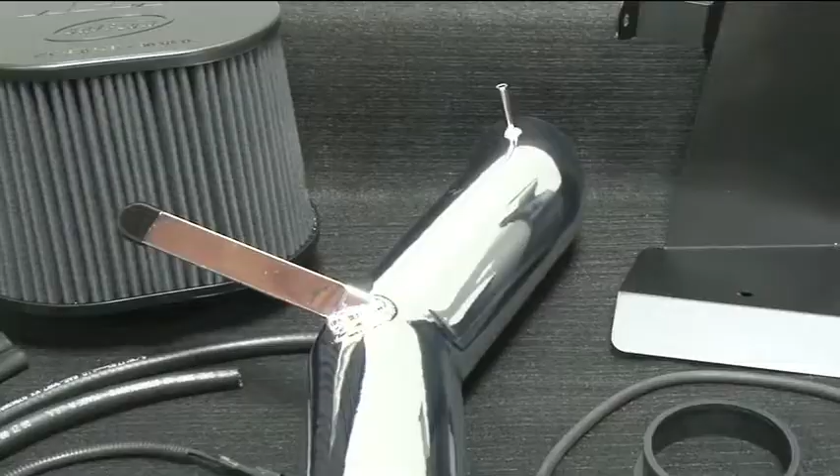AEM 41-1101C and 41-1101P air intake systems are engineered to add horsepower and reduce restriction compared to OEM air intakes, and they come with a lifetime limited warranty. AEM intakes utilize a reusable dry flow air filter. These oil-free filters are durable and very easy to clean.

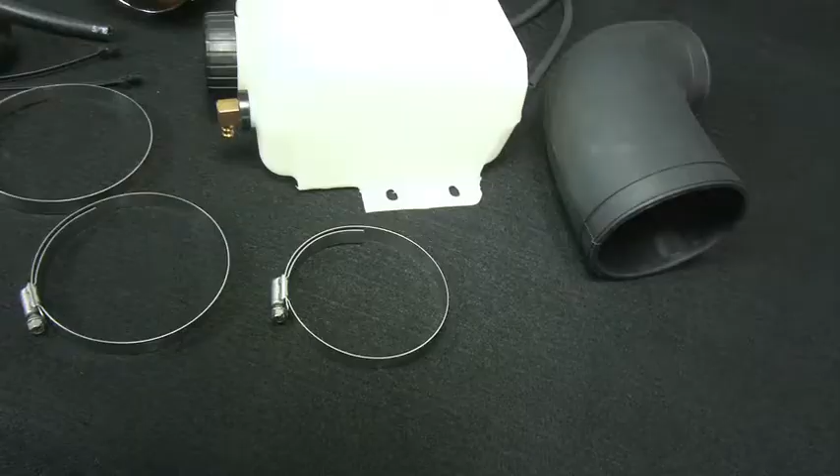AEM 41-1101C and 41-1101P air intakes fit 2010 Ford F150 models with 5.4-liter engines and other vehicles as specified in the AEM catalog or on AEMintakes.com. These air intake systems are not legal for highway use in California or other states adopting California emission standards. Check AEMintakes.com for up-to-date information on emissions legality for specific parts on specific vehicles.

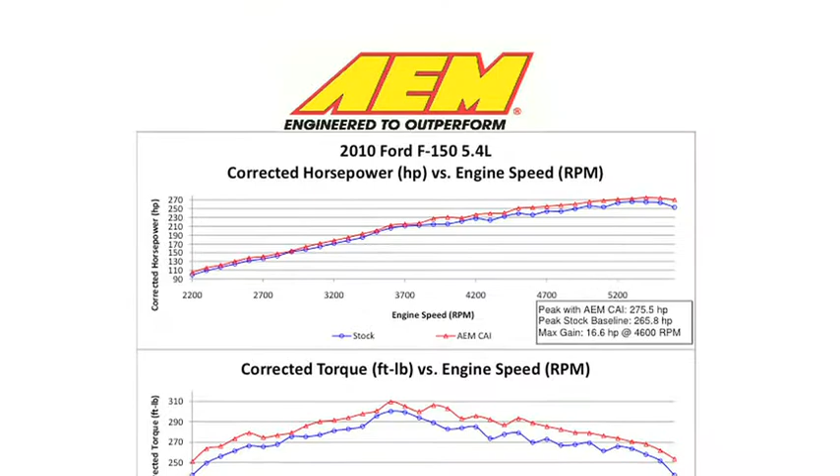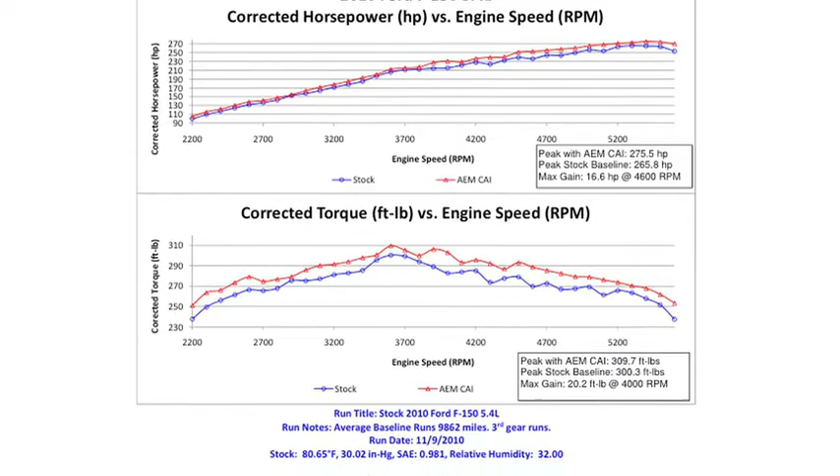AEM power testing showed an estimated power gain of 16.6 horsepower at 4,600 RPM with this air intake installed on a 2010 Ford F150 with a 5.4-liter engine. Actual results will vary depending on the condition of the vehicle, mileage, weather, and other variables. Here's a comparison of the Ford truck sound on the dyno with the stock OEM system versus AEM's air intake system.

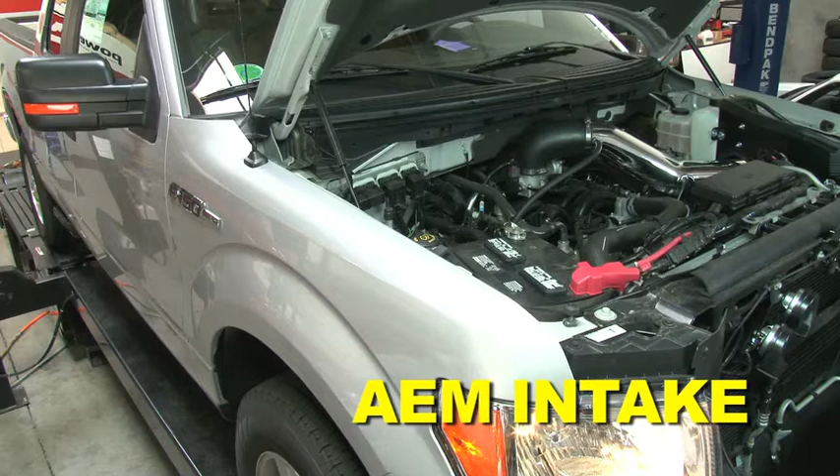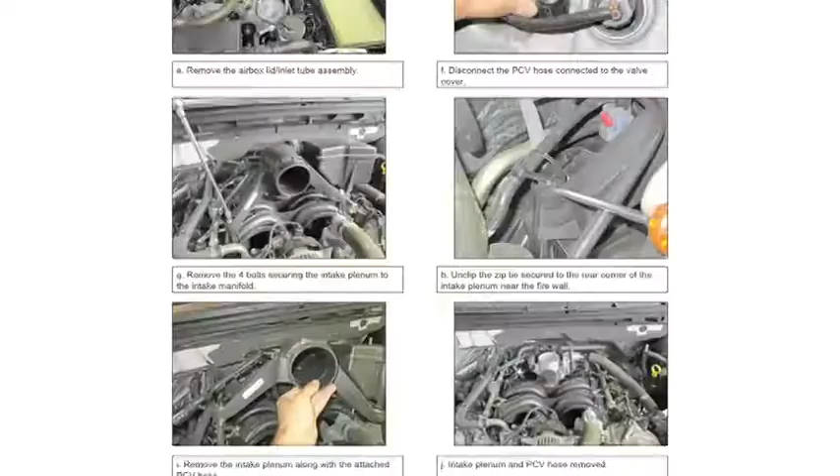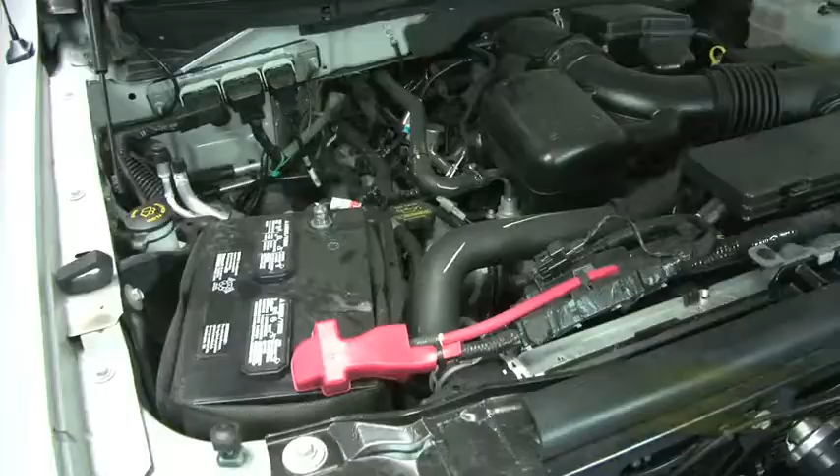AEM air intakes come with detailed instructions which include pictures and diagrams. AEM intakes are engineered for specific vehicles to produce a safe horsepower increase. Make sure vehicle is parked on a level surface. Set the parking brake. If engine has run in the past 2 hours, let it cool down. Disconnect the negative battery terminal. Do not discard stock components after removal of the factory system.

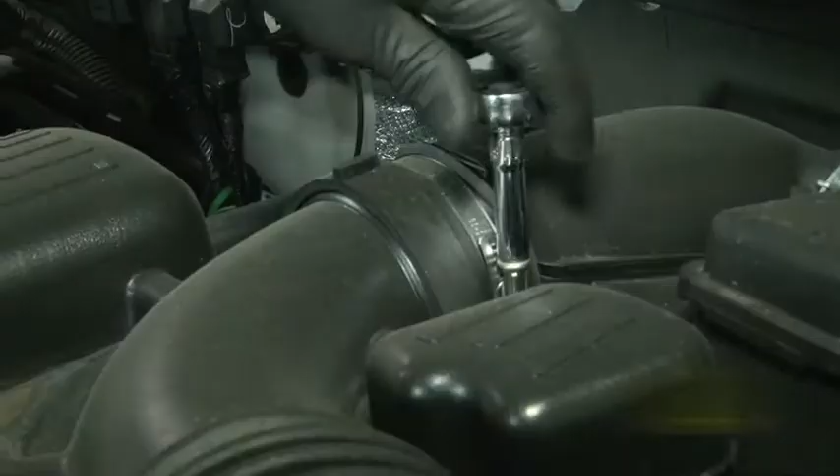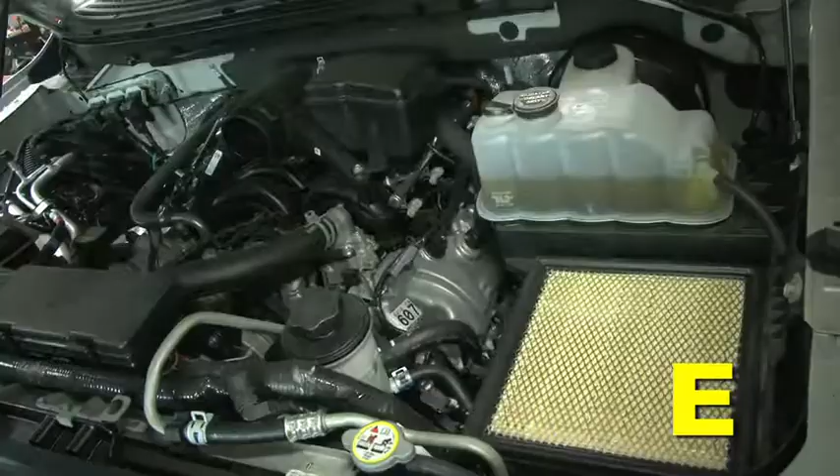Stock airbox system installed. Loosen the hose clamp connecting the inlet tube to the intake plenum. Disconnect the mass airflow sensor. Unclip the 2 clips securing the lid of the airbox to the airbox. Remove the airbox lid inlet tube assembly. Disconnect the PCV hose connected to the valve cover.

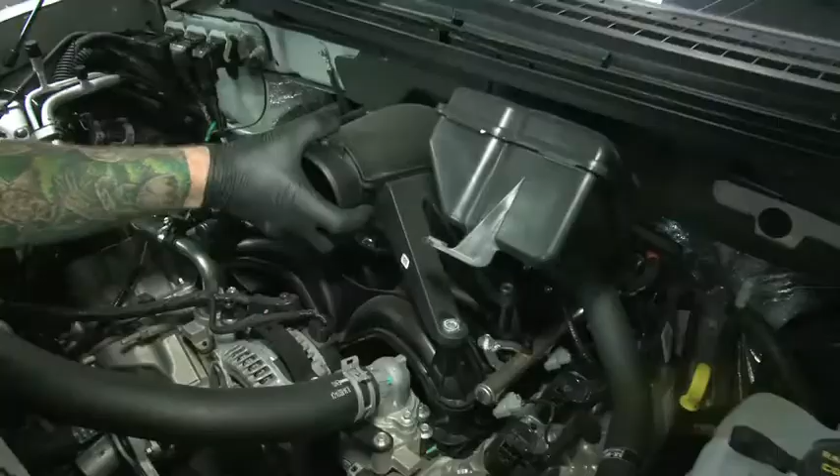Remove the 4 bolts securing the intake plenum to the intake manifold. Unclip the zip tie secured to the rear corner of the intake plenum near the firewall. Remove the intake plenum along with the attached PCV hose. Here's a view of the engine bay with the intake plenum and the PCV hose removed.

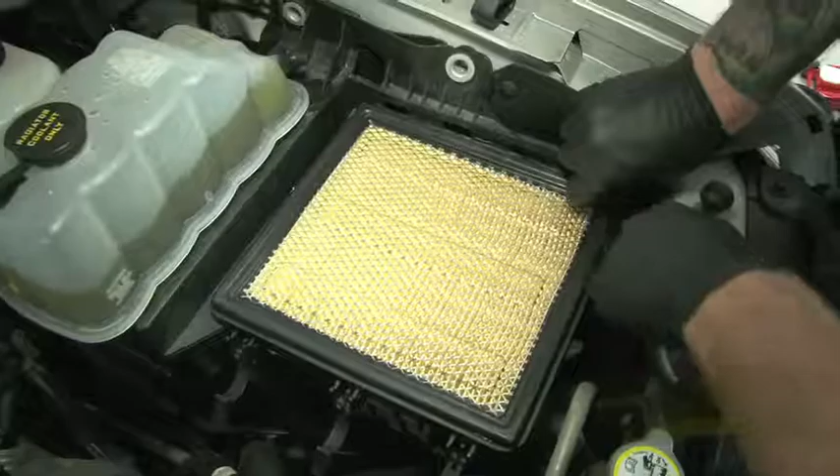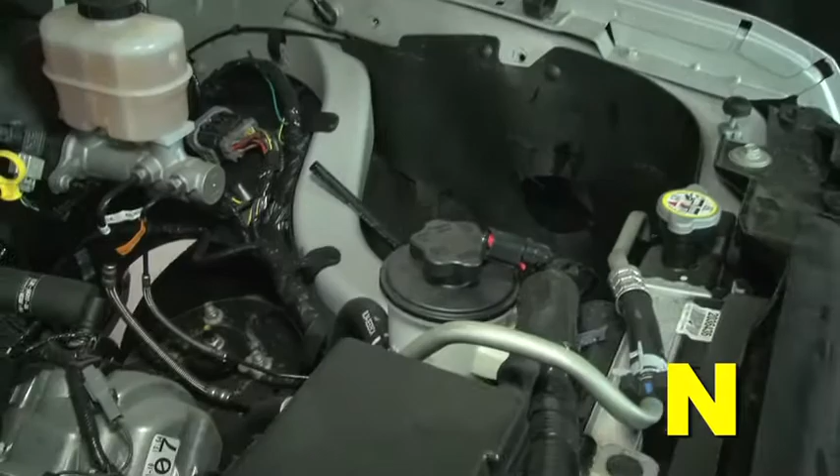Disconnect the overflow hose from the overflow tank. Pull the overflow hose out. Remove the 2 bolts securing the airbox and the overflow tank assembly. Remove the airbox and the overflow tank assembly. Remove the radiator bolt from the radiator support. When installing the intake system, do not completely tighten the hose clamps or mounting hardware until instructed to do so.

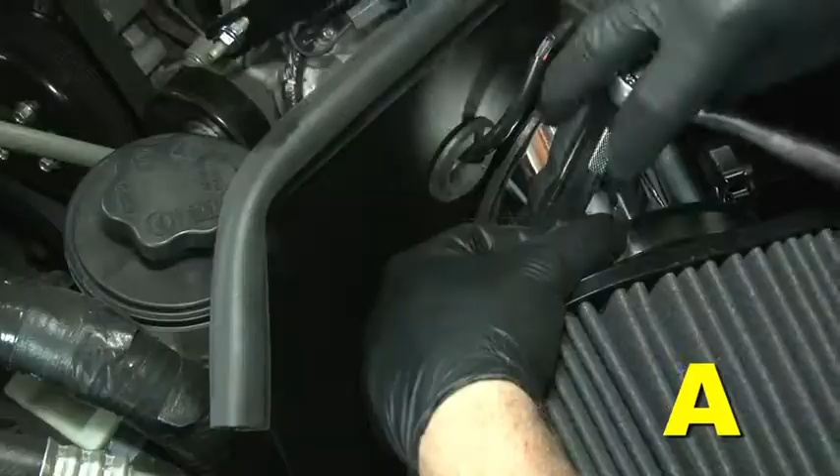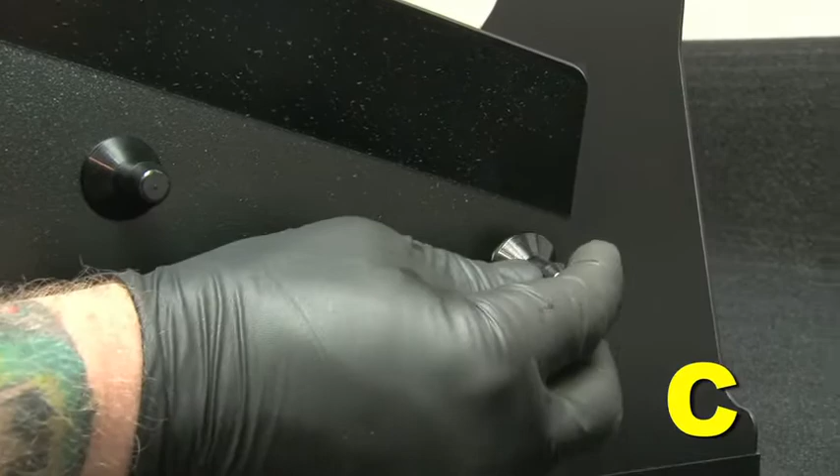Install the 90-degree coupler on the throttle body with the supplied number 56 hose clamp on the throttle body side and a number 64 hose clamp on the inlet pipe side. Install the 2 black heat shield mounts with the supplied M6 bolts and washers. Install the supplied grommet in the heat shield hole.

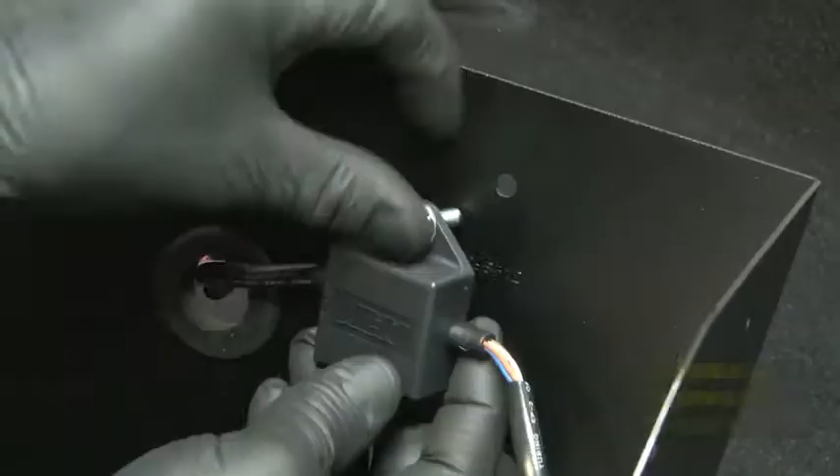Insert the male connector of the ETI module through the grommet. Attach the ETI module to the heat shield using the supplied bolts and nuts. Attach the supplied bracket to the heat shield with the supplied bolt, washer, and nut. Install the heat shield into the vehicle, aligning the heat shield mounts with the stock grommets.

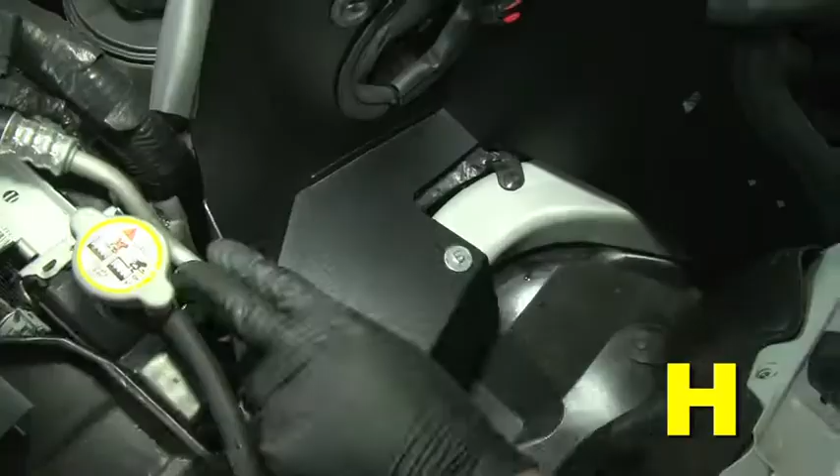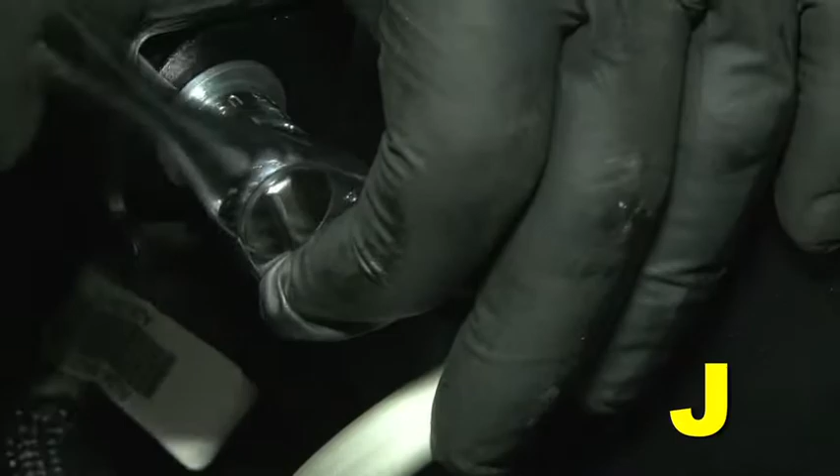Install the aluminum spacer onto the radiator support where a bolt was previously removed in step 2.0. Secure the heat shield tab to the spacer on the radiator support. Secure it in place with the supplied bolt and washer. Install the supplied bolt, securing the heat shield to the fender.

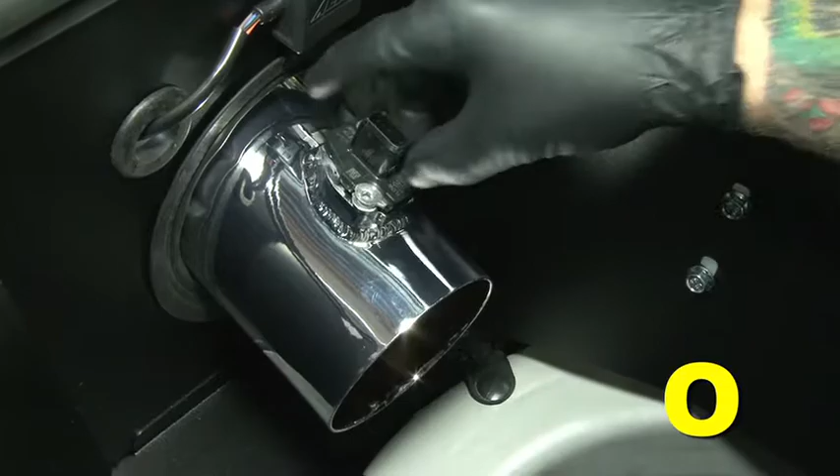Install the supplied washers, bolts, and nuts to secure the AEM overflow tank to the heat shield. Install the supplied bolt, washer, and nut on the other side of the AEM overflow tank. Insert the intake pipe through the heat shield inlet hole. Install the MAF sensor into the intake pipe and secure it with the supplied bolts.

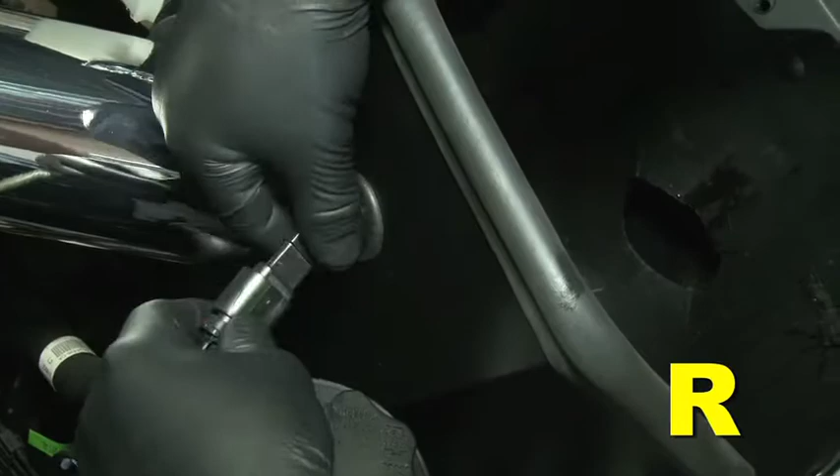Align the bracket with the stud on the vehicle. Insert the intake pipe into the 90-degree coupler. Also secure the intake bracket to the stud with the supplied washer and nut. Connect the factory female connector to the ETI module. Connect the ETI female connector to the male connector on the extension harness. Connect the extension harness to the MAF sensor.

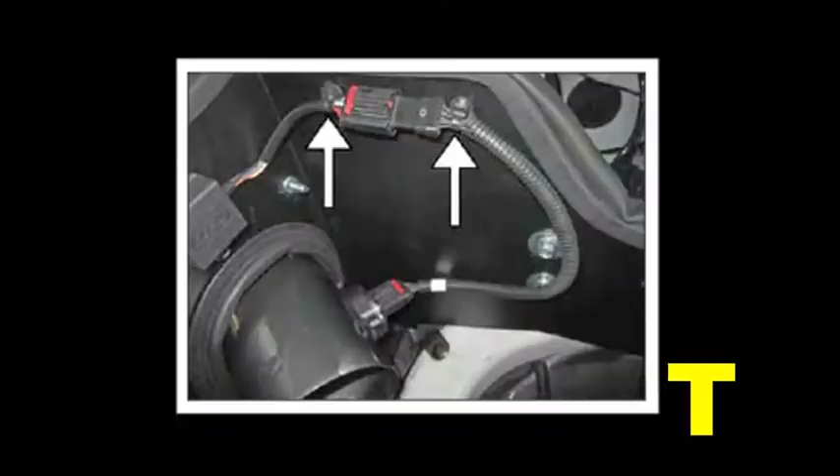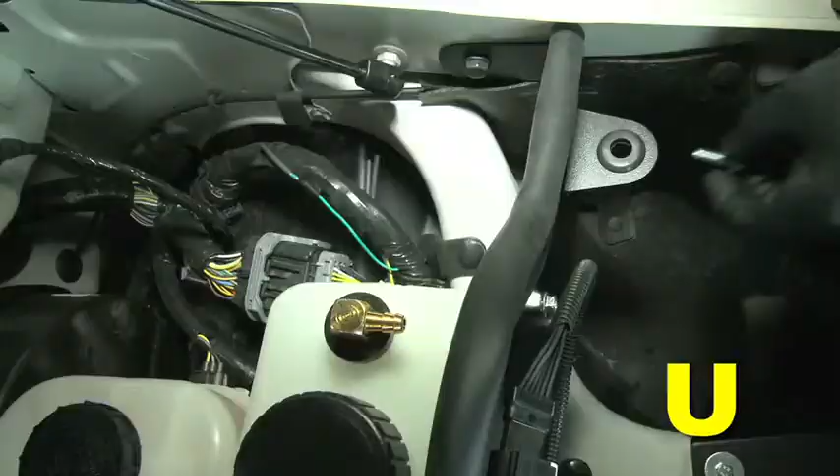Insert the 2 tree mount zip ties into the small cavities in the heat shield. Secure the extension harness to the heat shield with the tree mount zips. Tighten zip ties and trim excess plastic. Install the supplied grommet into the bracket's hole. Secure the supplied bracket to the heat shield with the provided hardware.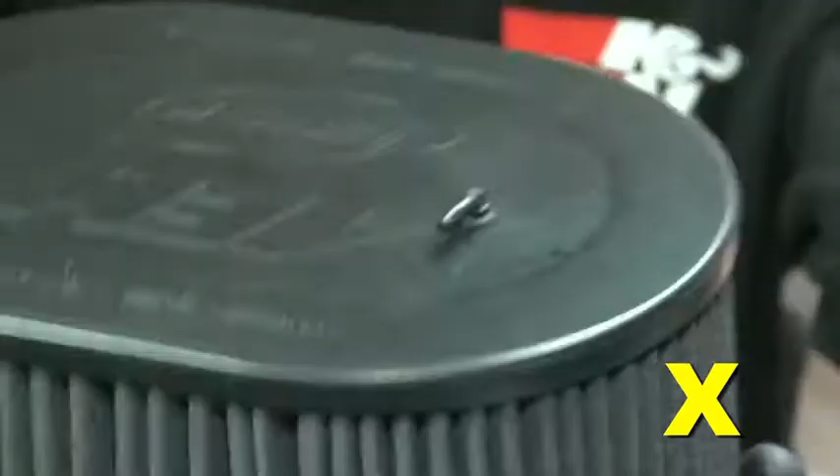Install the number 64 hose clamp around the air filter neck. Then insert the rubber filter adapter into the air filter inlet. Connect the small hose to the 90-degree elbow. Install the air filter onto the end of the intake pipe. Position the filter so that it is not in contact with any part of the vehicle. Then tighten the hose clamp so it is secured to the intake pipe.

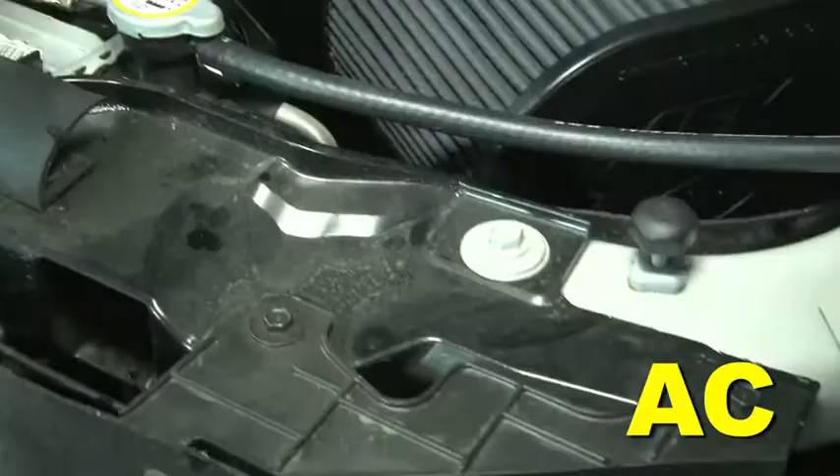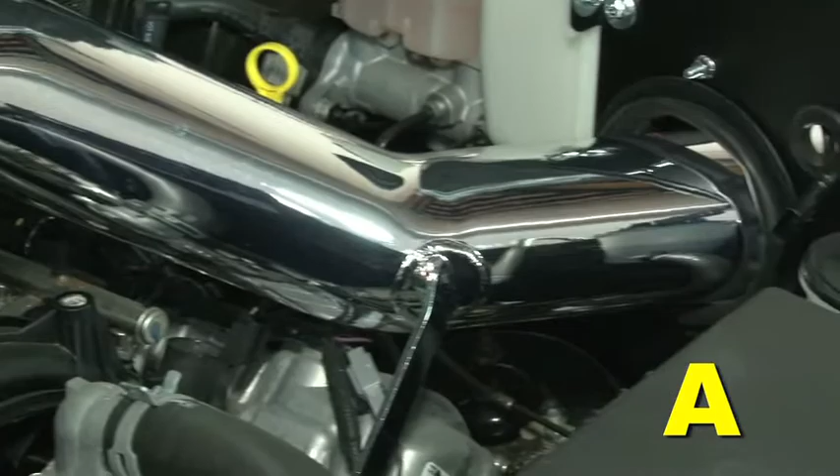Remove the stock overflow hose. Install the supplied overflow hose onto the radiator. Route the overflow hose to the AEM overflow tank and install the hose clamp. Fill the AEM overflow tank with the coolant drained from the stock overflow tank. Position the inlet pipes for the best fitment. Be sure that the pipes and any other components do not contact any part of the vehicle.

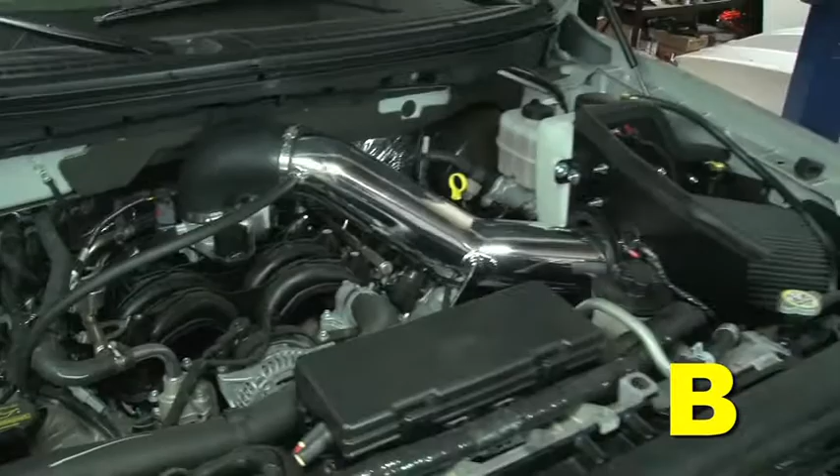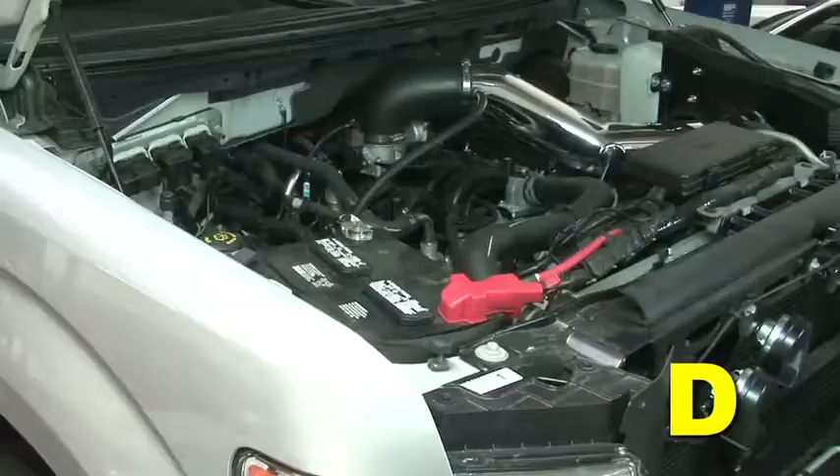Tighten the rubber mount, all bolts, and hose clamps. Check for proper hood clearance. Readjust pipes if necessary and retighten them. Inspect the engine bay for any loose tools and check that all fasteners that were moved or removed are properly tightened. Reconnect the negative battery terminal and start the engine. Let the vehicle idle for 3 minutes. Perform a final inspection before driving the vehicle.

It will be necessary to check AEM air intakes periodically for realignment, clearance, and tightening of all connections. Failure to follow the above instructions or proper maintenance may void warranty.